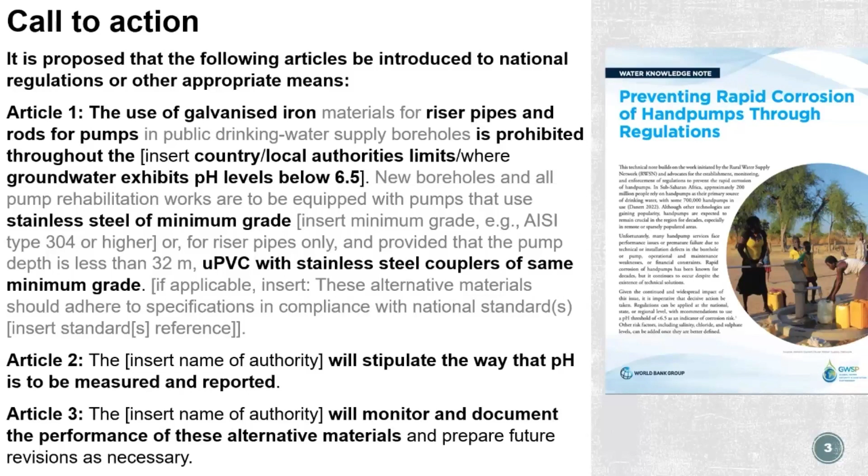Each country will need to determine what's most appropriate for the particular context, and that's something that we may want to discuss later. Secondly, it calls for countries to stipulate the way that pH is measured and reported. Thirdly, it calls for the respective authority to monitor and document the performance of alternative materials, that's alternatives to galvanised iron, also known as GI.

So rapid corrosion of submerged steel and GI, galvanised iron, hand pump components is one of several reasons for a swift technical decline of infrastructure, reducing its lifespan and affecting its functionality. What happens is sometimes components that should last for 8 to 10 years need to be replaced within a few months or a couple of years.

Galvanised iron hand pump riser pipes or rods in low pH water can corrode very rapidly, as can materials with inadequate galvanising quality and low quality stainless steel as well. And in fact, these low quality materials can also corrode in water that's not even very aggressive.

Rapid hand pump corrosion results in high levels of iron in the water, and that often leads to users rejecting that water because of the taste and the colour. And these issues, alongside premature failure, can basically result in users no longer having access to a safe drinking water supply. Then reduced pump lifespan increases the operational costs to keep services working.

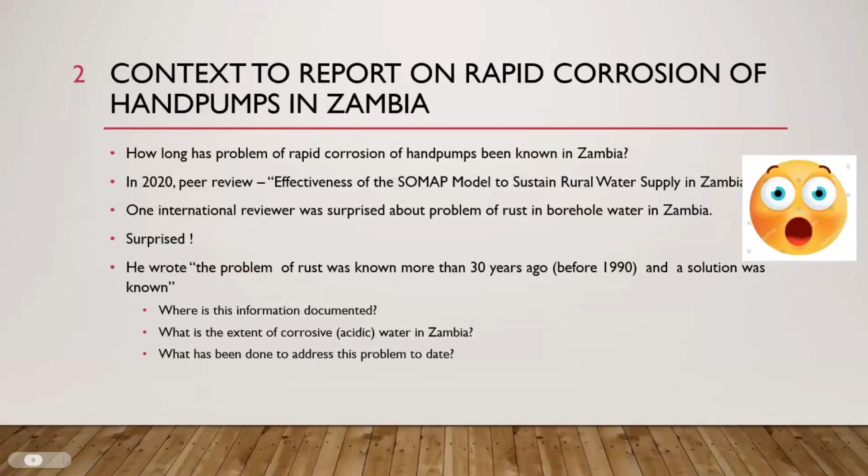The documented evidence about the problem of rapid hand pump corrosion was first documented in the project reports of the Central Province Rural Water Supply Project of 1985 to 1996. The project installed 564 hand pumps with stainless steel riser pipes, rods, and pumps because of the corrosive groundwater.

The second documented report is the 27th WEDC conference, held in Lusaka from the 20th to the 24th of August 2001. In the paper India Mark II Maintenance Systems by Frank Pitcher, he presented two projects: the Eastern Province Rural Water Supply Project and the Central Province Rural Water Supply Project of 1985-1996. The Central Province Rural Water Supply Project used India Mark II hand pumps with stainless steel riser rods and riser pipe.

The third report is from WEDC consultants Harvey and Skinner, in the study of sustainable hand pump projects in Africa. The consultants visited Zambia in April and May 2002. Their findings include this statement: in Central Province, due to corrosion, galvanized iron riser pipes were changed to stainless steel riser pipe.

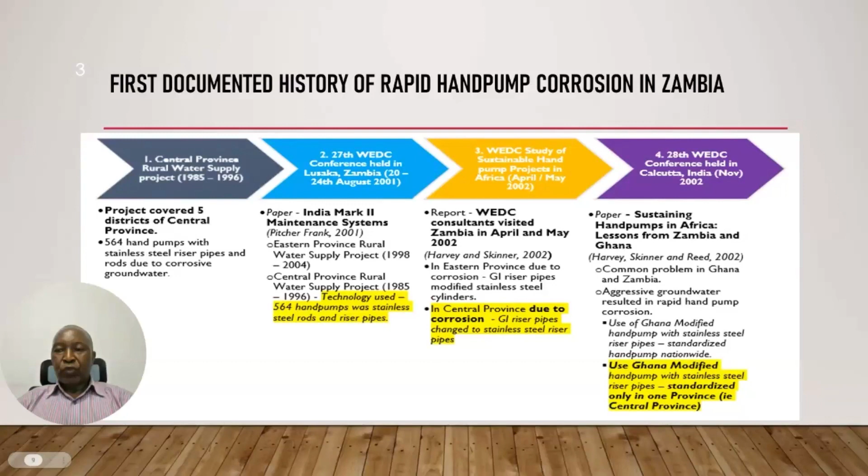The second question is on the geographical extent of aggressive water in Zambia. The response is taken from the work of the Soil Survey Unit of Mount Makulu Agricultural Research Station here in Zambia, under the Ministry of Agriculture. The survey unit mapped soils of the whole country. There is a report, the Soil Map of Zambia 1987, second edition.

The soil survey has delineated the agroecological zone into three regions, Region 1, 2, and 3, with the following characteristics. Region 1 has less than 800mm rainfall per annum, and the soils are slightly acidic, covering 12% of Zambia's landmass. Region 2 experiences 800 to 1,000mm of rainfall per annum, with soils which are acidic. This covers 42% of Zambia's landmass.

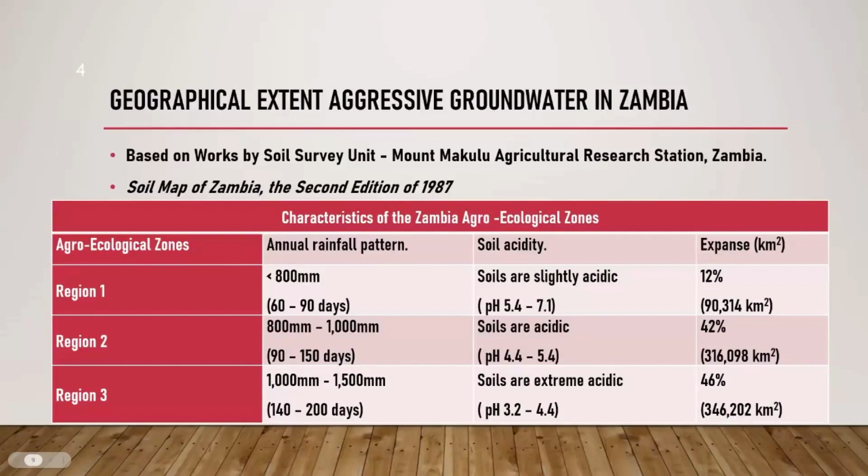Region 3 experiences 1,000 to 1,500mm rainfall per annum. The soils are extreme acidic. This covers 46% of Zambia's landmass. The rainwater, which percolates through the soils to the groundwater, picks the acidity from the soils. This gives the recorded level of acidity in the groundwater. This results in groundwater being acidic to extreme acidic, with pH range of 5.4 down to 3.2. The acidic condition extends to 88% of Zambia's landmass.

This slide shows the agroecological zones and the soil acidic maps of Zambia. The three regions are well delineated and spread out, as you can see. The second map shows the soil acidic map, delineated according to the low level of pH, low level of acidity. That's the pH levels.

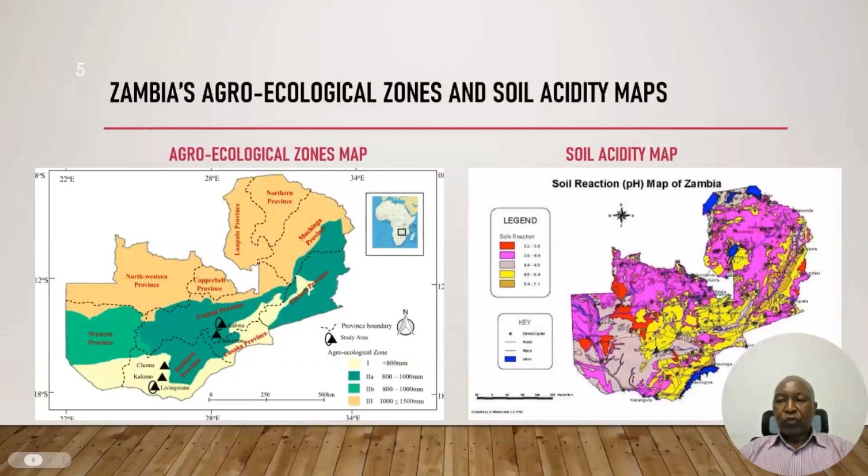The third question is on the history of efforts in Zambia in relation to rapid hand pump corrosion. I've picked 8 studies and projects that have been conducted since 1985 to date to address rapid corrosion in Zambia.

1. The Central Province Rural Water Supply of 1985 to 96. 2. The Rural Water Supply in Northwestern Province. 3. The Groundwater Development Project in Luapula Province. 4. The SOMAP 3 Pipe Replacement Study by JICA. 5. The Water Sector Program Support. 6. The UNICEF Pipe Replacement Study in Luapula Province. 7. The UNICEF Borehole Drilling and Rehabilitation Program. And 8. The Scaling Up of Nutrition on Technical Assistance, SUN TA project.

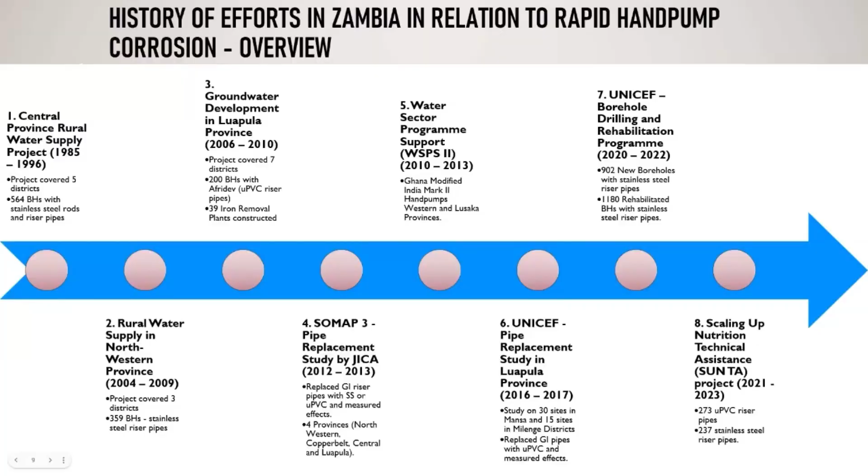What is the conclusion? 1. Aggressive or acidic water is found in 2 regions, Region 2 and 3 of Zambia's agroecological zones, 88% of Zambia's landmass. 2. Rapid hand pump corrosion in Zambia has been known and documented since the 1980s. 3. Efforts to address the rapid hand pump corrosion in Zambia through various studies have been made, but the problem still persists, including in new installations.

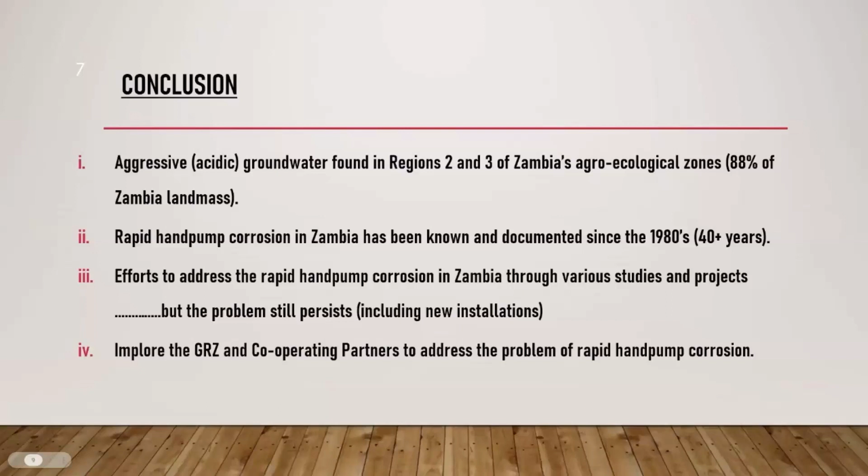4. We implore the government and cooperating partners to address the problem of rapid hand pump corrosion. The potential next steps by government, international donor communities, and the universities are summarized in the following.

1. Need to revise the national water policy to include aggressive groundwater in community boreholes. 2. Restrict types of hand pumps to certain regions. 3. Enact statutory instrument on aggressive groundwater in community boreholes. 4. Provide incentives to private sector for provision of corrosion-resistant pipes and rods. 5. Regulation of quality of hand pumps by Zambia Bureau of Standards. 6. Standardize hand pumps used in Zambia.

7. Topics for study: 1. Replacement of galvanized iron pipes. 2. Research studies on naturally occurring iron in groundwater and surface water. 3. Research studies in saline water in southern and western provinces.

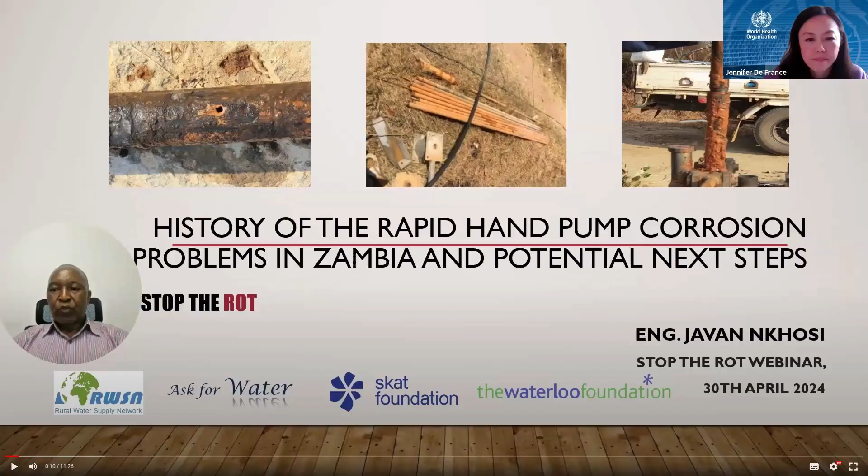Let's take a look into the Ugandan context on the use of hand pumps. We have 67% of the rural population covered by safe water supply. 84% of the rural water systems are functioning at the time of visit. 80% of villages have a safe water source, and the existing stock of point water supply sources has got 63,000 hand pumps, of which the ministry estimates that 44% of the rural population are covered by boreholes and 23% by shallow wells. The analysis also suggests that nationally, 43% of the population rely on hand pumps as their source of water supply.

The question here is, why undertake a study and initiative in Uganda? Simply stated, Uganda has taken a systematic approach to address rapid hand pump corrosion by issuing a directive that everybody involved in water supply dealing with hand pump technology must adhere to. In 2016, the use of galvanized iron was eliminated within the country, and this gave the threshold onto which the Stop the Rot initiative has been looking into.

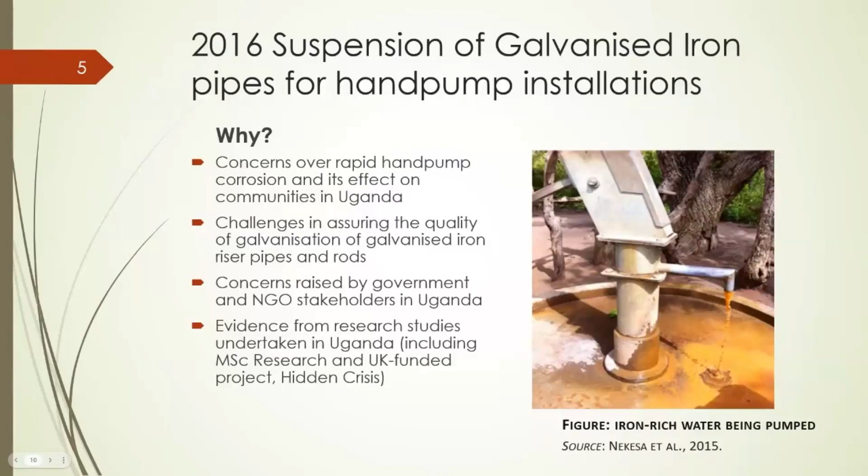Through time, it is very important to note that finding what works is not an easy thing. It's almost 8 years since the directive was issued, but we're still finding what works as a country. Initially, some organizations adopted stainless steel grade 202, but over time we found that this also underwent rapid corrosion. Other organizations took on plastic pipes with stainless steel couplings, and these have been very useful and good.

But also through the years, we have realized that some people are resorting to mixed installations. By mixed installation, we mean a borehole which has got both galvanized iron pipes and stainless steel pipes. Here, the stainless steel pipes are the ones put in the water, while the GI pipes are above the water. I don't know whether this helps, but definitely it's not a solution we're looking onto.

So the ongoing questions about which stainless steel grade is most appropriate is what the country is now addressing. And beyond that, how do you quality assure, how do you check the grade of the stainless steel? That's what we are having. So far, we feel that grade 304 is appropriate, but we have also had cases where other organizations are installing grade 316, which is of course a lot better.

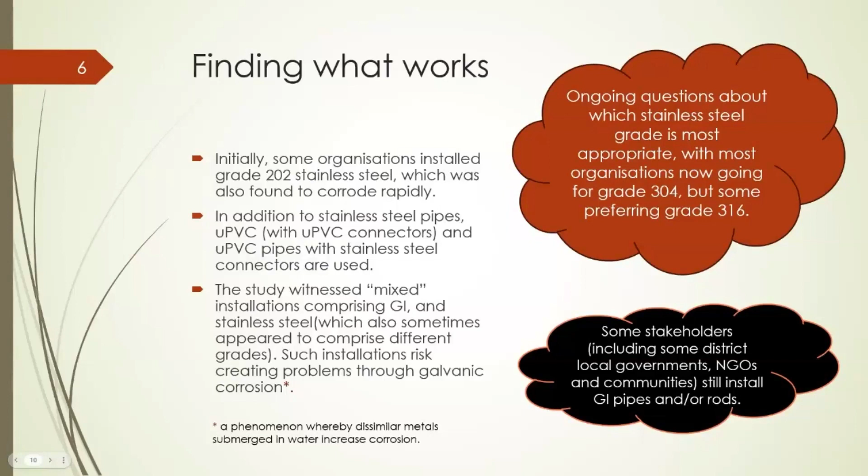Nonetheless, there still exist some stakeholders who are using galvanized pipes as of today, but we also want to understand why they are still insisting on the use of GI as opposed to the directive. The key findings over time have been that the directive has been largely appreciated by many sector players.

Of course, there are also challenges that the directive has met, in that the time of issuing the directive is 2016, and the directive is referring to standards that are 14 years back. So 2002 standards are being recalled in the directive until 2016. So there are issues there that we need to look into as a country.

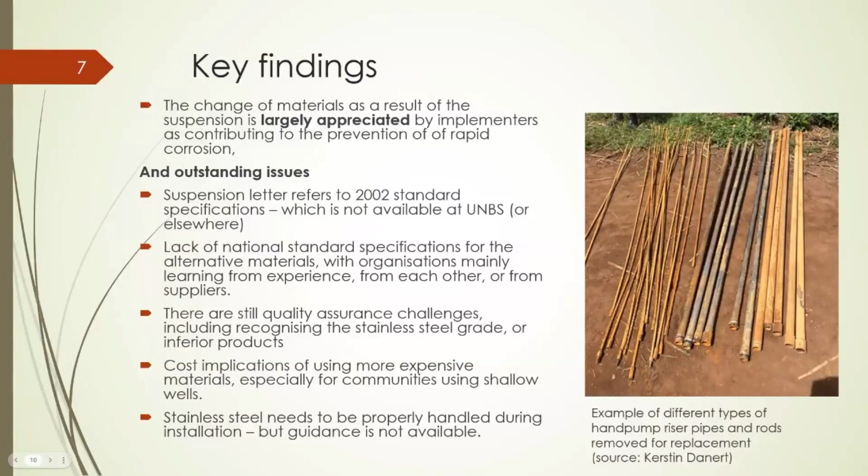Of course, it comes along with cost implications, but maybe that's what sector players have to agree and live by as the key standards.

To give a bit of the story, we can see that some of the stainless steel pipes that have been installed have got maybe vertical cracks and horizontal cracks, and this could either be due to the quality of the material, or the quality of the installation, or the quality of handling. So all these are issues we are trying to manage as a country, as we migrate and work towards implementing the directive.

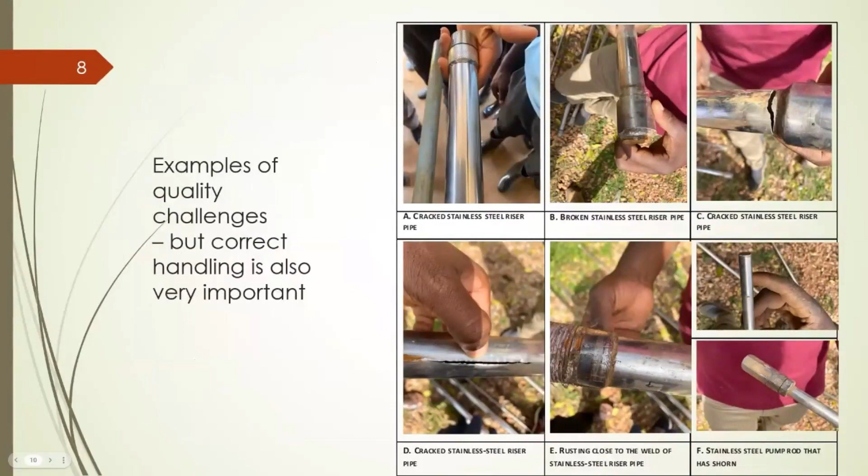Now, there have been also other researches looking at how we can improve the existing technology, and yet still be able to manage the costs in certain parts of the country. We have had the installations of PVC, which is connected with stainless steel.

The first phase had 6 boreholes installed, and we as government are monitoring this very closely. They have functioned very well. We are looking at improving a few design improvements, and also increasing the number to 100.

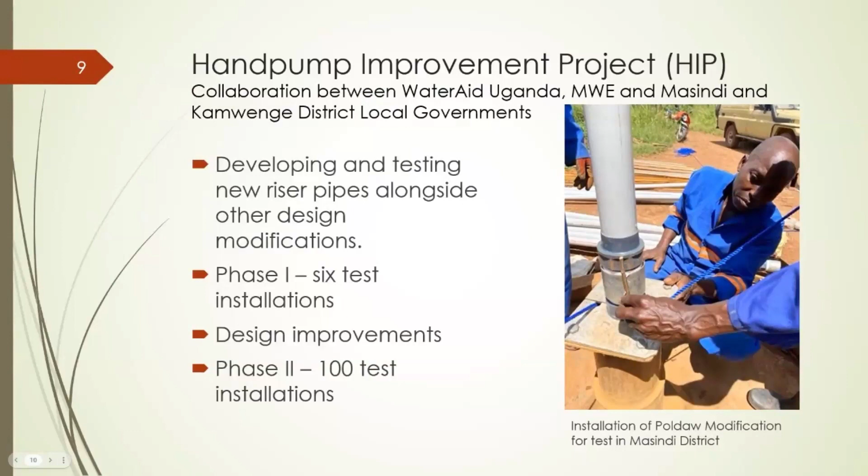We hope we can have the 100 scattered a bit in different parts of the country where the chemistry of the water is quite different, and then we also see how this is going to work out. Perhaps this might be the solution to the outstanding problem of the cost of the stainless steel pipes.

Then we are coming up with a few recommendations, some of which are local and some of which appeal to the institutions of academia, those involved in research and development. And then we're also looking at ourselves as a country, learning from other countries. Locally, we are looking at about 7 recommendations.

The migration to stainless steel requires a high cost. I think the first key recommendation is that they need to support the poor and vulnerable communities. Governments or other NGOs need to come in and support this to be able to have the complete overhaul and change from the GI to the stainless steel community boreholes.

We have also seen that in order for the new technology, the new pipes that are coming in, the human resource that exists has been very much used to working with galvanized iron pipes. So therefore, it is necessary that they are trained on how to handle stainless steel pipes.

It is also important that we support the quality assurance efforts, so that whatever is found on the shelf is the material of right quality and standards that meets the requirement. So they need to develop a certification mechanism.

Now, it goes without saying that awareness creation is very, very important. People need to understand why they have to go to stainless steel, and why they need to suspend the use of galvanized iron, what are the appropriate alternatives, and what are the simple tests that can be done to tell whether corrosion is from the iron pipes or from the aquifer, and so many other things that need to be done.

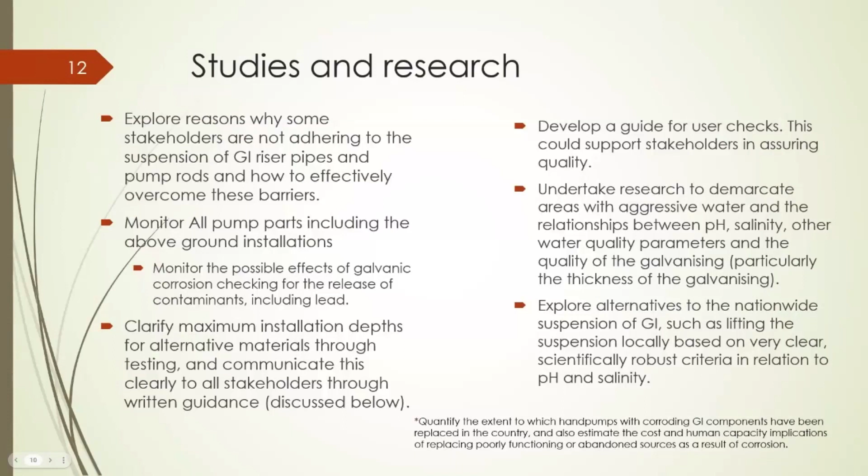Lastly, I think that we as a country are so much interested in the Stop the Rot initiative, because it's going to link us with other countries, especially Zambia and Cameroon, and how they are doing. We want to learn from each other so that our work leads to supporting our rural communities in having access to safe water and sanitation.